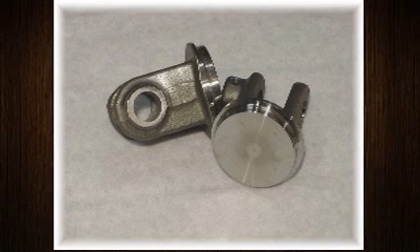Bula Forge makes a wide variety of custom forged products for a number of different industries. From rough steel forgings to finished machine products, Bula Forge has you covered. Did I mention we do assemblies? Welding and fabrications are also included in our long list of capabilities.

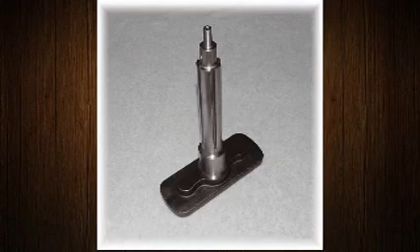Value-added services such as heat treating and protective coatings allow our customers to receive a finished product ready for use in their application.

My initial reaction to Lean is, what is it? A lot of people said, what is that, a diet? I was introduced to a majority of the Lean ideas many years ago, and I still feel that it is a good tool set to help increase productivity and reduce waste.

Really, I have to admit, I was hesitant and unsure that our type of manufacturer would be able to go lean, and wondered if we were heading for a big downfall.

Initial reaction to Lean was, oh, we're going to try that again. We did some Lean projects in the past, like 5S, but didn't follow through with them.

My initial reaction to Lean was I was excited to begin learning about Lean concepts. Since I'm in sales, anything that would improve delivery and quality of product definitely interested me.

My initial reaction to Lean was that Bula could definitely benefit from it. I also knew that it would take commitment from the upper management down. Luckily, Wayne and Karen are dedicated to Lean and are helping to get everyone else on board.

My initial reaction to Lean was that it makes sense. We have to move our focus from working on urgent items to working on things that will actually improve the business. Lean needs to have our focus and attention.

Initial reaction to Lean concepts was not negative, like it can't be done here, but more of curiosity. How will we apply Lean principles in a shop where the machines are massive and immovable, and how will we approach one-piece flow with setups of 2 hours or more?

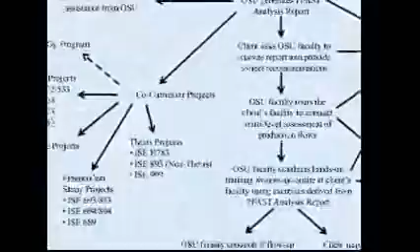If you had the time and patience, I could share with you exactly how, once you began with the question 'help me implement Job Shop Lean,' I could lead you through multiple option pathways. All of them would essentially leverage correctly the various co-curricular and extracurricular programs that we have in a good industrial engineering program like the one we have at Ohio State.

It's my pleasure to work on the organizational development project at Bula Forge. This Job Shop Lean initiative uses the Quick Start approach to JS Lean developed by Dr. Irani as a foundation of the analysis.

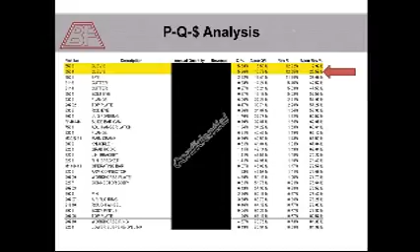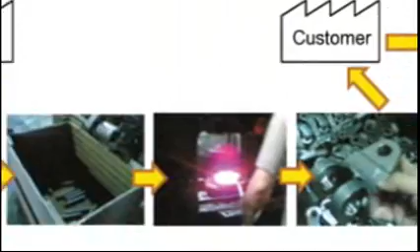We collected data including revenue, quantity of sales, and the routings of all the parts. The software FAST was used to create part families. Based on the results of PQ$ analysis and PQT analysis, we identified that parts 6503 and 6504 have very high contributions to the company.

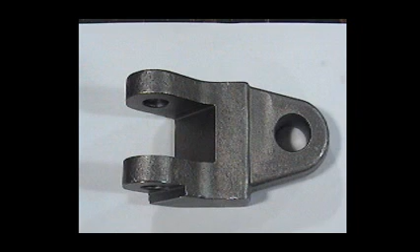So we selected 6503 and 6504 as the focus of our Lean project. They are clevises similar in configuration, two components of the tow bar assembly supplied to the military used to recover disabled military vehicles. They are one of our constantly produced products with identical process routings, which made them ideal candidates for our Lean project.

My name is Wayne Phelps Jr. I'm the Forge Shop Manager here at Bula Forge and Machine. I'm here to introduce 6503 and 4: saw, forge, normalize, and delivery.

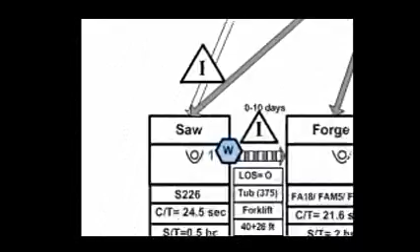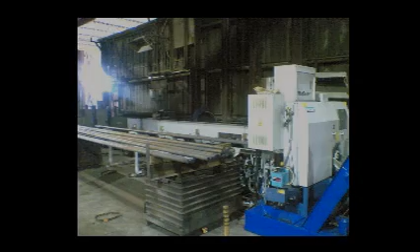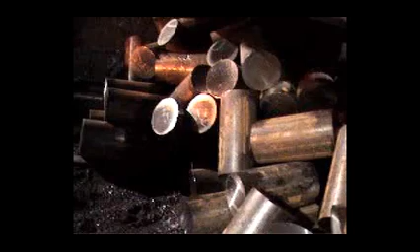Saw is where we take a long piece of bar stock and cut billets to a specified length or a specified weight. Each step is specific, whether it's length or weight. The clevises go by weight. The purpose of this operation is to use the least amount of raw material and still completely fill the part. Also, the weights have to be consistent or you will get a larger variation in part thickness.

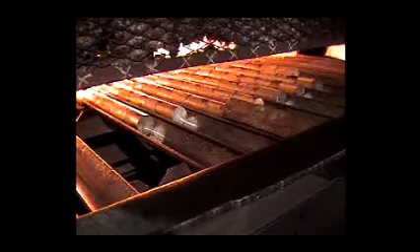Forge. The clevises are forged on a 2,500 ton press. The billets get pushed through a furnace and heated up to 2,200 degrees. The forge press operator takes the billet and hits it in 3 different impressions. The first impression is the buster die. The billet is stood up on end, and the dies are flat and set to a specified length. The dies break the scale off the billet and give the length we need for the second impression.

The second impression is the blocker die. You lay the billet down into an impression that roughly gives you the configuration of the part. The third impression is the finisher die. You take the block part and place it into the finisher. This impression does exactly what it says—it gives you all the finished dimensions of the part.

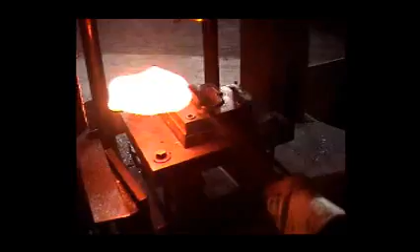After the forge, it goes to the trim die. You place the finished part into the trim die and the trim punch pushes the part through the trimmer, which takes the excess material on the outside of the part and literally trims it off. The purpose of this operation is to transform round steel billets into a sellable part.

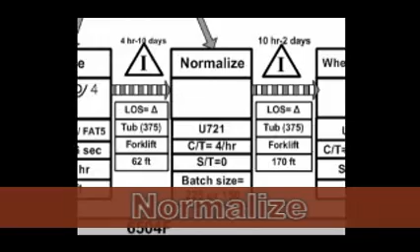Normalize. We take the parts and put them into a furnace that heats them up to 1,650 degrees. Once they get up to temp, it has to be maintained for 1 full hour. After the part gets placed in the holding cell, which allows them to slowly cool down, the purpose of this operation is to refine the grain structure, which takes the stress areas out of the part. It also makes the part softer for easier machinability.

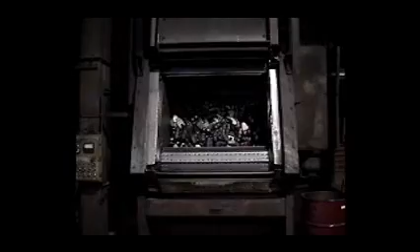Wheelabrator. You take the part and put them into a machine that pours shot onto them. The purpose of this operation is to clean up the scale that is on the part from the previous operations.

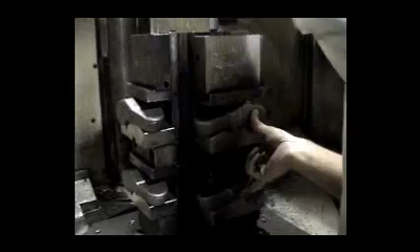We take a forge blank, it's a custom specification. There are 4 stations; we do it horizontally on a tombstone. The first station we mill a side, the second station we mill a side. The third station we drill a hole in the nose hole. Then the fourth station we cut the slot, step in the ear, and drill holes.

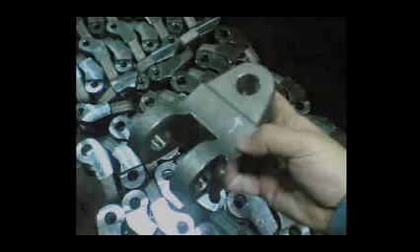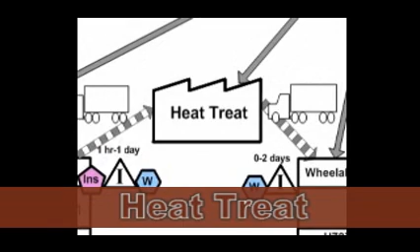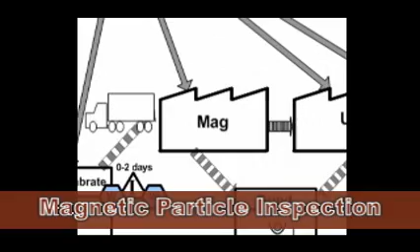We get 2 finished pieces, and then heat treat: a combination of heating and cooling operations applied to a metal or alloy in a solid state to obtain desired conditions or properties. Mag particle inspection is detection of surface and near-surface flaws in ferromagnetic materials.

Ultrasonic testing uses ultrasound, scanning surfaces with high frequency sound waves in order to gauge their integrity and check for flaws or measure thickness of parts. We use it to check for flaws. We do not use it to check the thickness of the parts.

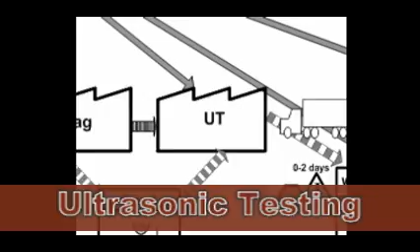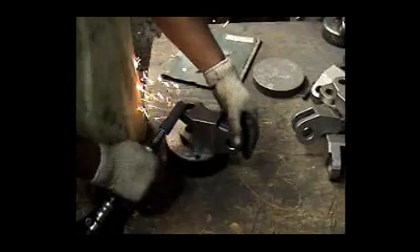The next step we do is grind, gauge, and pack. Because we wheel abrade them after heat treat and all the testing operations, the parts get nicked on the outside. So we go around the part and grind the nicks out, and then we gauge the holes to make sure the holes are still the proper size, and put them in a box.

Then they go up to shipping, and then they get weighed in. The box gets banded, and out the door they go.

Making some improvement during a short period of time might not be so difficult. However, sustaining the momentum is always a different story. That's why we organize a lean manufacturing discussion group to create a sustainable lean culture and implement cascade training starting from the top management. The team received trainings, studied the value stream of 6503 and 6504, and practiced several problem-solving techniques.

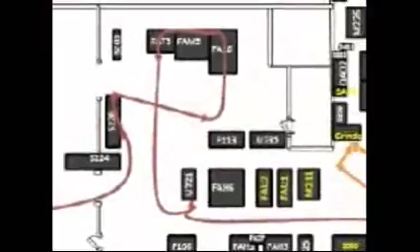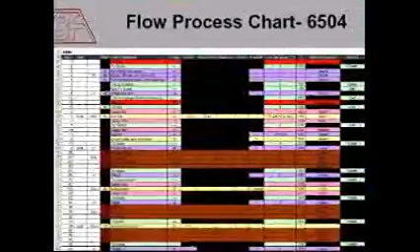For example, we use the flow diagram to show how those parts flow through the facility and identify backtracks and crossflows. We use the flow process chart to break down the production process into small elements and record the detailed information, especially the information of non-value-added activities.

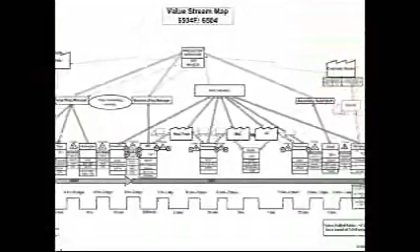Also, the value stream map visualizes the material information flow for part family and serves as a tool for communication. The members of the group were required to study side readings including The Goal, Lean Thinking, and The Toyota Way. We have lectures and open discussions during the meetings. Then we work on individual or group projects as assignments and present the results during the next meeting.

Something I've learned from this training is that there are a lot of different parts to lean, and they all have to work together to make it work. The most important thing I learned from this experience is how to identify waste. A lot of things we have routinely done in the past now have me asking, is there a better way? Get your employees involved. It will never work if I try to do it all myself. It is possible. You just have to do it.

Lean is not one technique, but a philosophy of continual improvement. It requires courage to try something new and commitment to stick with it when things go wrong. With the training and education we receive showing how waste can be eliminated through careful thought process and teamwork, we can make our organization a lean company. And I'm anxious to move on to other company processes to see what waste can be eliminated from them.

The most important thing that I've learned from Lean is that we are not Toyota. Toyota has good practices and ideas. However, we must make Lean adaptable to our business. As I started reading about Lean, the way Toyota has mastered it and the way most experts today are talking about it, it hit me that really not much...